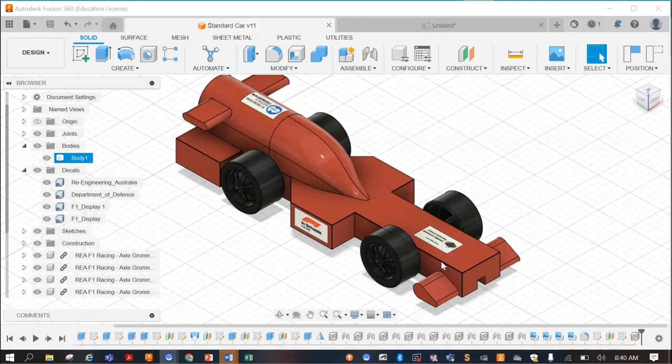So it's just a matter of splitting that car body. It's already done, so you don't have to match up slopes and stuff like that. It just makes it 10 times easier. So to do this, we're going to go to offset plane.

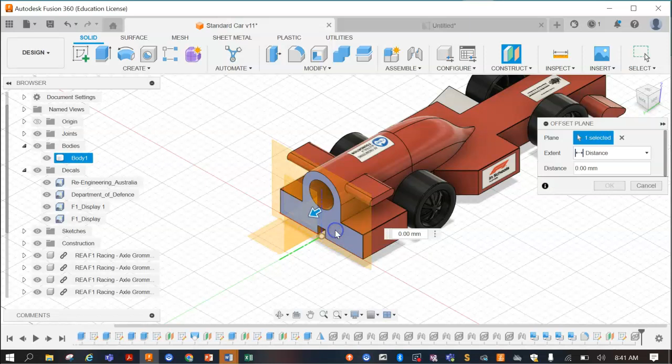I'm just going to click revert position. Just ignore the virtual cargo there. I'm going to go to the back of the car and select here, and drag this to the front of the car. Go to the side view.

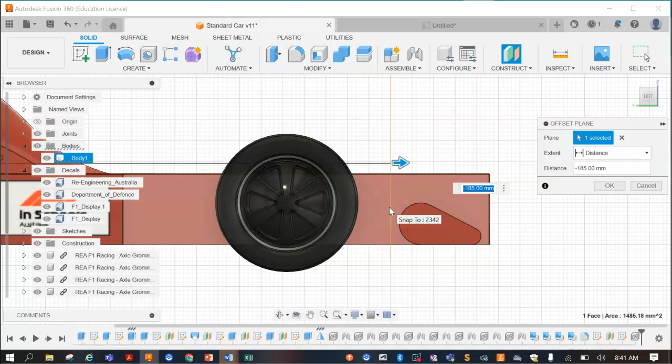Now this plane is where you want the split to happen. So let's just say, for example, you want this part of the car to be the front wing. I could go here. At the moment I'm at minus 185, but for you it could be another dimension, it doesn't really matter. Wherever you want that to be, but it will need to be in front of the front wheels here. If you're happy with that, press OK.

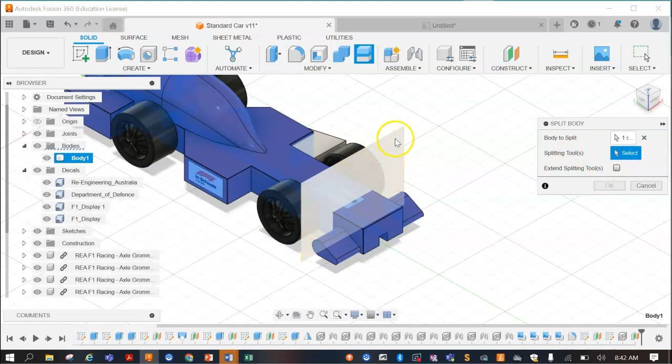Just going to click in the corner here. So that's where the split's going to be. If we use the split body tool now, we can select the car body, then go to splitting tools and select, and we're going to select that plane. That's where it's going to split. Press OK.

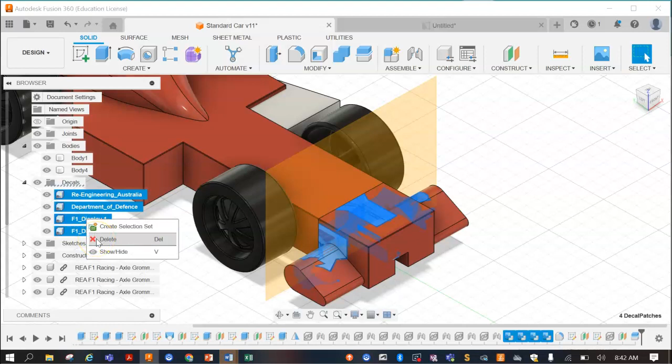Now when I've been playing around with this, I noticed that for some reason the decals all come to the front here. I don't know why it does that. So what you can do is just delete all of these. I just held shift and clicked on all of them, then right click delete and remove them. Those decals you can put back on the car later, so it doesn't really matter for now.

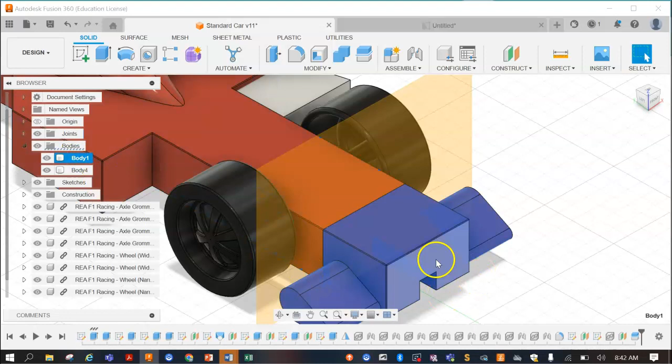But as you can see, you now have a split down the middle. So body 4 is the actual car, body 1 is obviously the front here. And that's probably why the decal is stuffed up, because it's saying that this is body 1 now.

Now you've got that. What you can do as well is think about how you're going to join these parts together. At the moment it's just a butt joint, which means it's basically two flat surfaces coming together, and I can show you what that looks like.

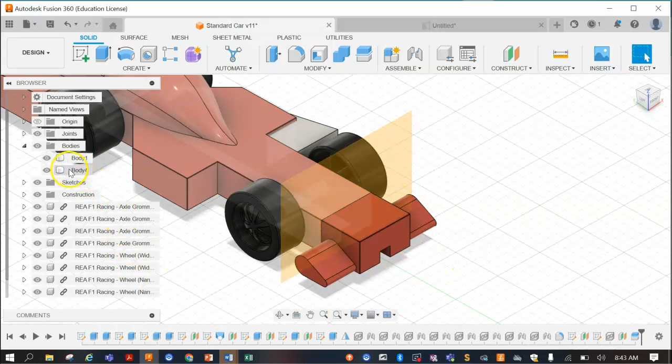So if I hide body 1, see how it's just a flat surface here. I hide body 4, and it's just a flat surface here. If you were gluing those together, you'd just put some glue on it, put them together, and that's about it. Now for F1 in Schools, that's not good enough, that's pretty average, so it's going to be really hard to align it to get it all in perfectly, to make sure it's all nice and straight.

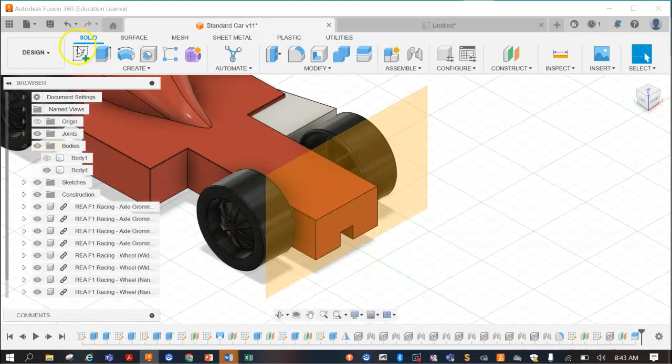So what I would do is, for example, I could hide body 1 and focus on this part now. So I'm going to create a sketch on that surface. Now, just one example of what you could do, we could create like a little tongue here.

So making a rectangle, I'm just going to do it as a random size for now and go to dimensions. I can go from like this side of the rectangle, and it won't let me select that outer edge, so I'm going to hit escape. I'm going to press, actually I'll do it on here, but we're going to do project geometry, which is this one, project. The shortcut is P, so I could have just hit P on my keyboard and used it.

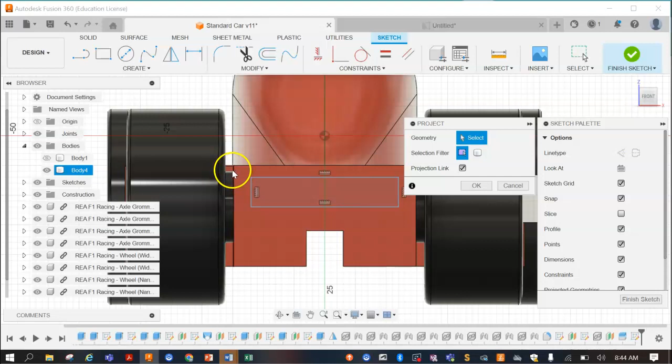So I'm going to project this, actually we'll just click on this surface here, press OK. Now it's projected that whole outline there. So let's try again, go sketch dimension, from there to there. Let's just say we make this one 3 millimeters. Do the same on this side, 3.

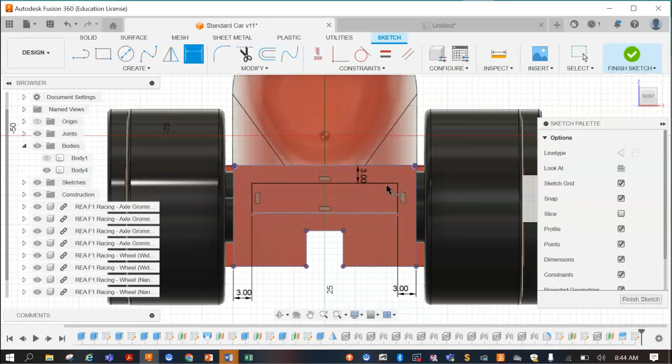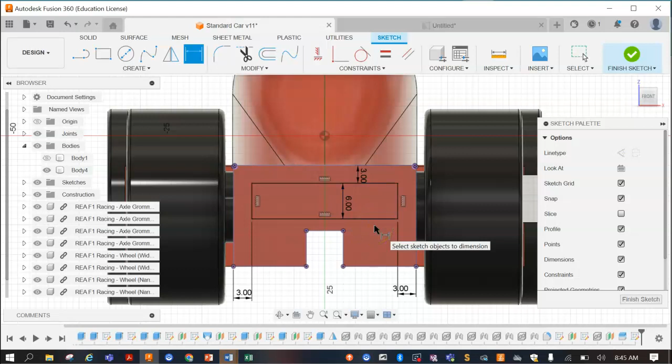And I might just make it all the way around 3 millimeters. Then I'll probably just do the dimension for the actual rectangle itself. At the moment that's about 5 mil, let's just say we make it 6. That will do. So all the way around it's 3, 3, 3, and then the actual rectangle was 6 millimeters wide like that. So what you're going to have to do is finish the sketch.

Just click on the corner, and we can then extrude that shape out this way. Let's say we extrude it out by, oh no, let's just do 8mm for now. Cool, alright, so we've got that now.

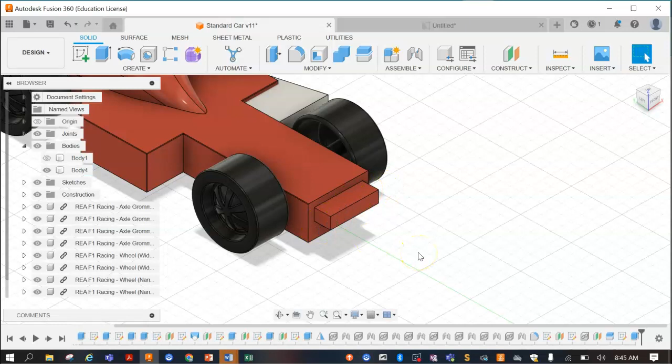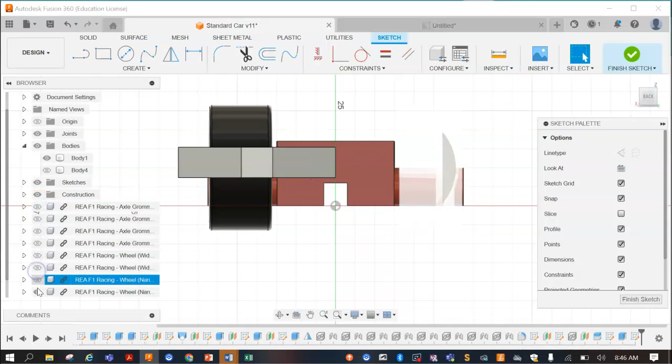Alright, so start a sketch on here now. If the wheels and stuff are in the way, we can just hide all these, and the virtual cargo as well. Awesome, alright, so same thing, rectangle.

I'm just going to do this one quickly. So from here to here. I think that's the correct edge, yeah. Alright, so that's 3. We'll do the last one. And from here to here was 6.

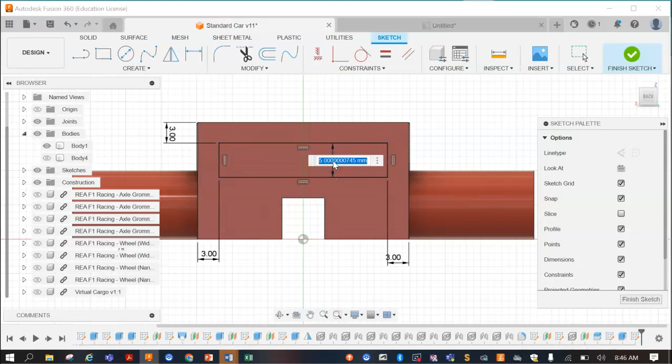Awesome. Alright, now, like I said, this one here now has to go in as a cut. And to match it up, it needs to be 8mm as well. Now, what I would encourage you to do is to make one of them slightly bigger.

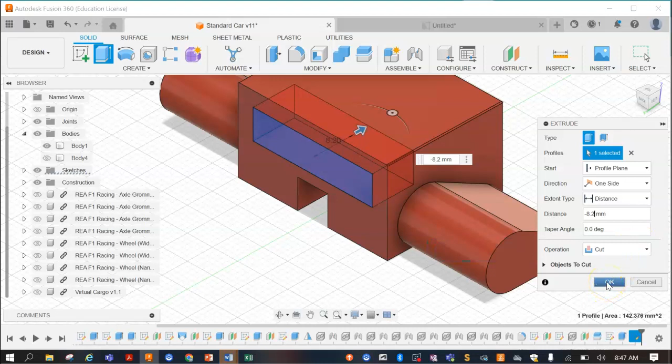So for this one here, you might want to do like 8.1 or 8.2 - you might just do 8.2 for now. So there's enough room in there to make sure it goes in all the way, and you've also got glue as well. Just to make that a little bit better.

Another thing you could also do is in that sketch that we just made - if I go right click, edit sketch, even some of these dimensions here, you might want to make them a touch bigger too. So this 6mm here, you can make that 6.2. These here, you can maybe make them a touch smaller as well.

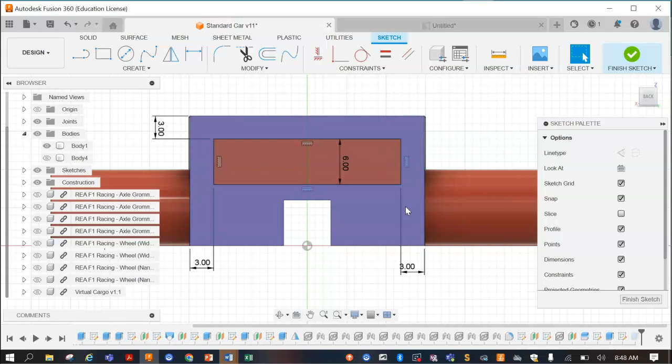So if you're finding that your 3D print isn't fitting perfectly, those are the type of things you can edit. You can talk about those things as well, and talk about how you need an extra clearance for glue and for making sure it fits perfectly. But anyway, I might just leave it like that for now. We'll go finish sketch.

Okay, so we've got that. Now, if I bring the body back, you can't actually see that joining. So what you could do here is right click on the body, on the front wing, opacity control, and I can change this down to like maybe 30, for example.

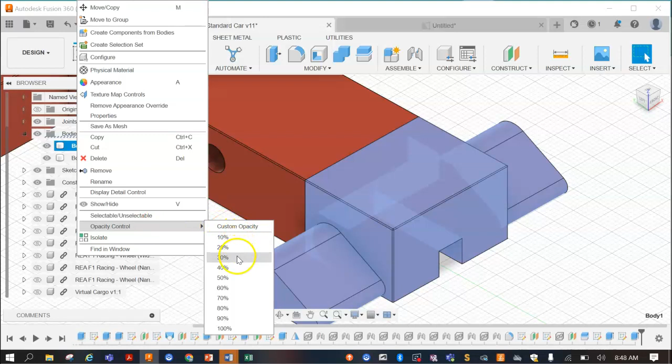Okay, now I could make that a little bit more. And then you can start to see how that joins up. So it joins up perfectly. You've got that tiny little gap at the end there, is what I put there. So you can start to see how that actually fits in together.

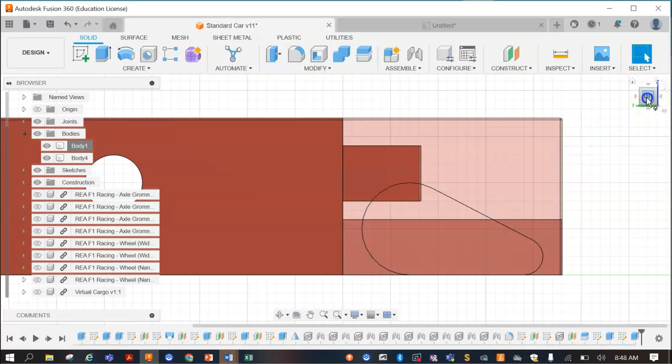But that's what you're going to have to do once you get your car body sorted. You don't have to use this method here - you can use different methods, but you want to make sure you can at least get it to fit something like this. So when I glue that front wing in, I know it's not going to rotate and it's going to align straight.

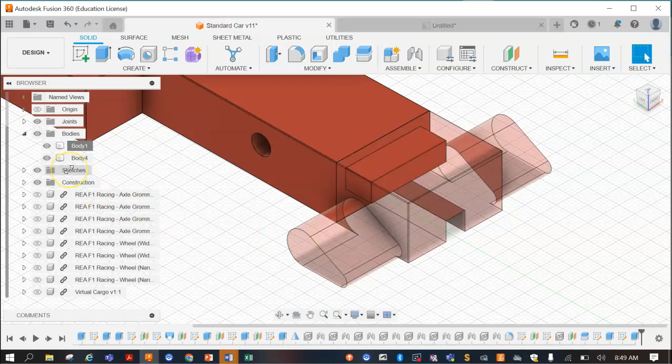One more thing to think about before we move on is for the car body, the machine can't cut sharp corners like this. So you'll need to go around and put fillets on those edges there. But that's something you're going to have to sort out.

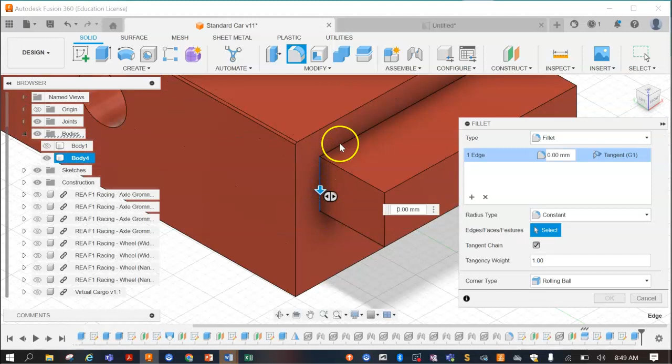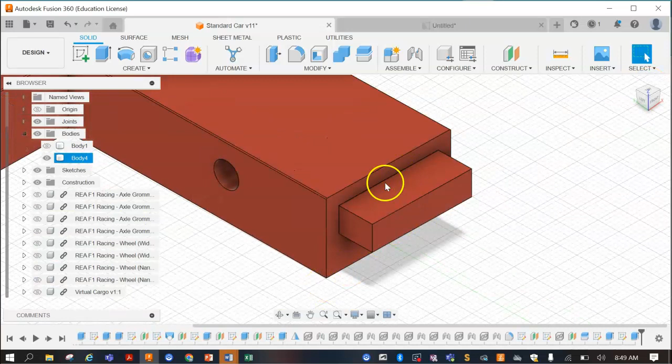So I'm not sure if it's going to let me do it, I think there might be an error for some reason, but if we were to make these 3mm, for example - okay, so there's an error there for me for some reason. I haven't got time to look into it right now, but that's what you would need to do: put fillets around there so it matches what your car will actually look like when it comes out of the machine.

In the next video we'll look through and start doing some FEA testing as well, so that will get you ready for some of your strength testing for your car and for your portfolio for the competition.

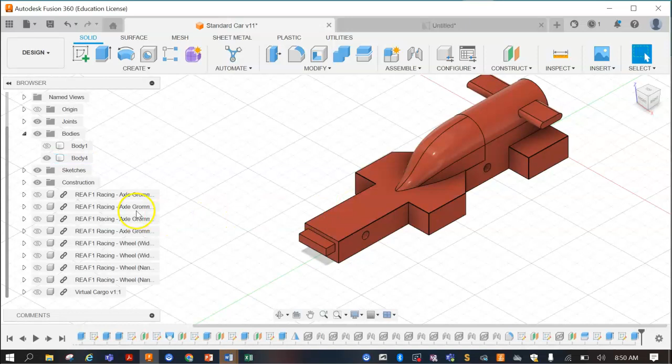Last thing I suppose I'll show you as well is, just remember to bring all these back. Just click on the little eye there, and all your parts will start appearing. Done. Thank you very much.